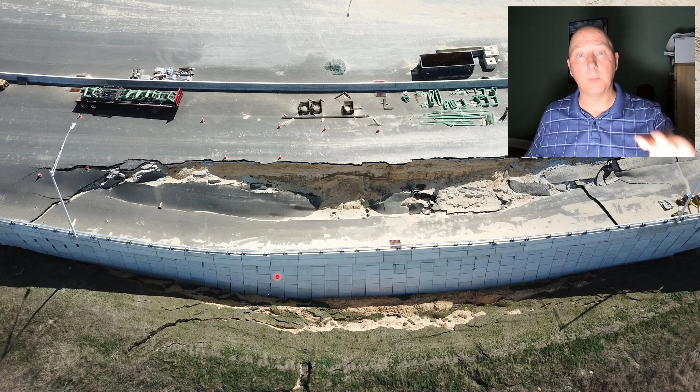All right, so this is the 295 South roadway. It was not in use at the time, but you can see what happened here: the underlying subsurface pushed out, carried the wall with it, and there was a severing there. This project is in Bellmawr, New Jersey. Here's Browning Road - this bridge is being rebuilt right now. This is 76 to 42. Philadelphia and Camden are up this way, Atlantic City's down to the bottom of the image.

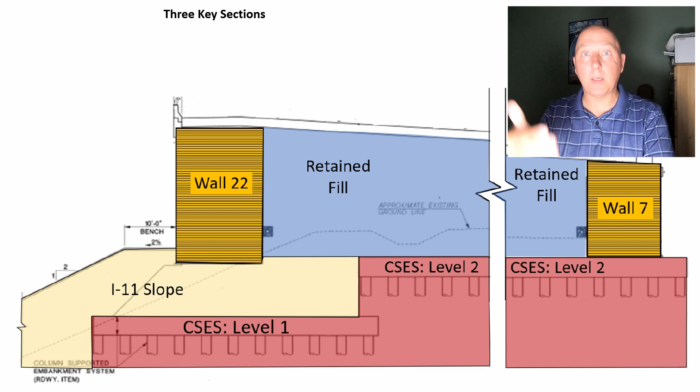And what we just showed with the failure in the roadway, this is the new 295 South right here, and they denote it as wall 22 in the documentation. They see this project as 3 sections - the document sees this as 3 sections. This sort of gives some highlights of why this thing failed, and we're going to talk about the key failures in one more slide, but they break this out into 3 sections.

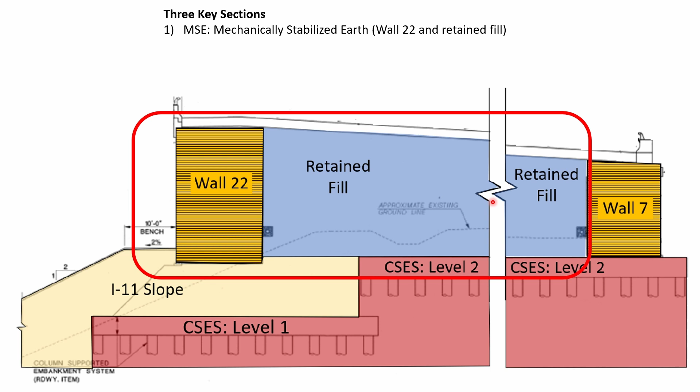The MSE, mechanically stabilized earth and retained fill - so this is the square concrete wall out here on this side. The cemetery's over here. This whole segment with the wall, its support steel bracings, and the dirt is one section. The slope here is actually a sand slope, so all the embankment here, and even under the wall - there's a hint, guys, this is all sand.

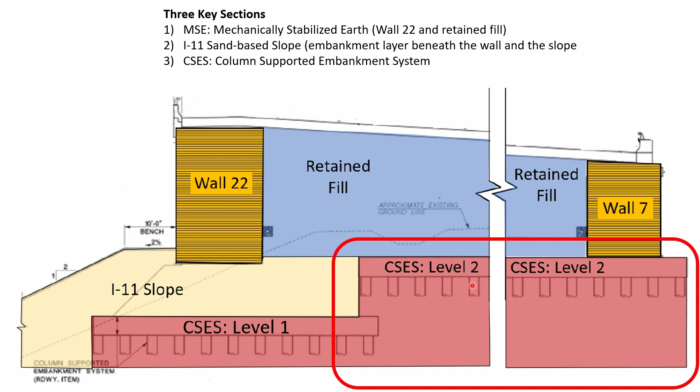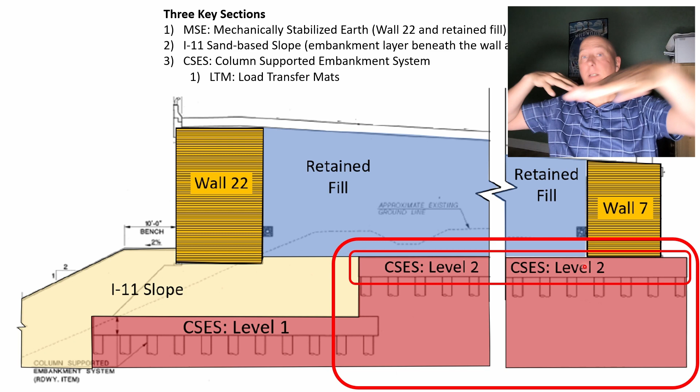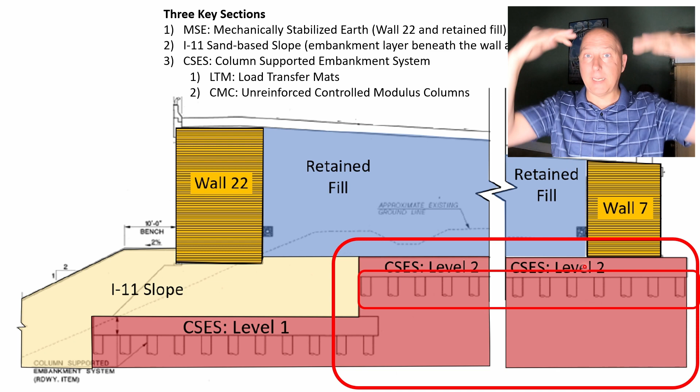And then the third segment, which I don't think I've spoken about - it's probably new to most of you guys - the CSES, column supported embankment system, that has two facets. The LTM, load transfer mats, horizontal mats that go out in a broader area to capture load above it. And then columns - these are actually, even though they're depicted shorter here, probably 70 feet long - columns that go down, so they capture the load on the mats and transfer it down to these columns to go to a lower level.

This report was actually done by Hardesty Hanover. They are not part of the Direct Connection Project. When the failure happened, the Department of Transportation wanted a sort of third-party group to analyze it. So this H&H - I'm going to say H&H because that's how they call themselves for the rest of the document - they are engineers, they build roads, they do all this stuff, so they were perfect people.

They talked to everybody - all the contractors, the design folks - did their own testing, literally tested everything that went into designing the plan, and then stopped to think: how were the conditions actually at the time of the failure? Let's rerun the calculations with that.

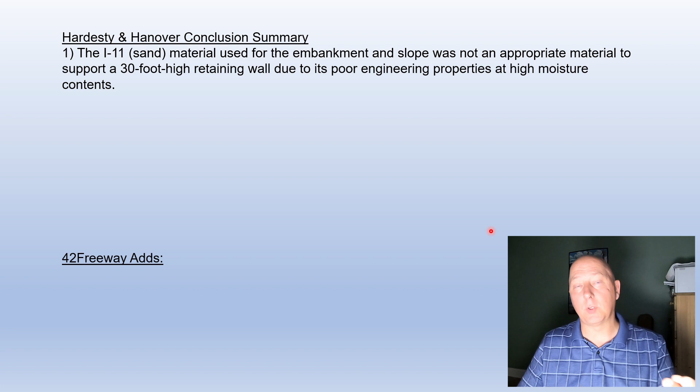So they open up their doc basically with an executive summary with, I think, 4 bullets, and then I add a couple. The I-11 sand material used was not an appropriate material to support the wall, and when the moisture conditions changed, it just made it even worse. There is a place for sand in projects like this, and we're going to learn that as we get through the slides, but it needs to be contained. And the fact that this was on a slope gave the pressure and the dirt an escape route.

The CSES, that lower level area, used unreinforced concrete columns, and they were not adequate to withstand the vertical and horizontal loads. I mean, some of these things actually sort of fractured and sheared, and they should have been able to hold up better to movement.

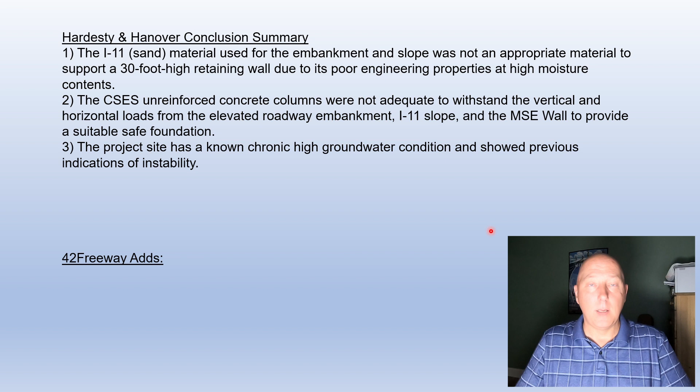The project site is known for - they use the word chronic - high groundwater conditions. A lot of research went into that. Basically, the water went higher than some of the early expectations were, and a lot of the engineering design concepts were based off a much lower water level. And the heavy precipitation the day before - actually the whole week, I think it rained 3 or 4 days out of the week - exacerbated the problem. The roadway should survive this, should stand it, but I think it's more of a straw breaking the camel's back. It's why it collapsed when it did, because so much water had hit.

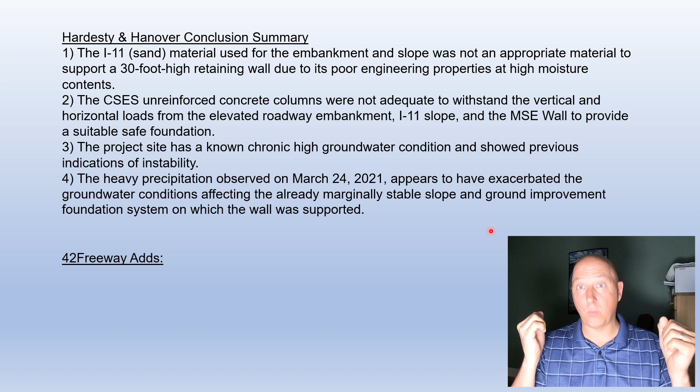I didn't want to confuse that aspect, even though I'm just giving my own verbal opinion here. But I know some of you are going to watch the first 3 minutes, so I said, let me throw these bullets in.

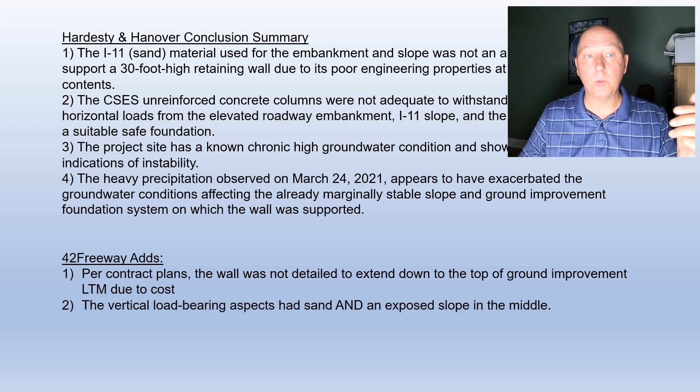Per the contract plans, the wall was not detailed to extend down. So as we'll see it again, you have the wall, you have sand, and then you have that lower level substructure. Basically, due to cost, the vertical load-bearing aspects had sand and then an exposed slope. So not only did you have the sand there, the sand was not contained. We're going to talk more about that.

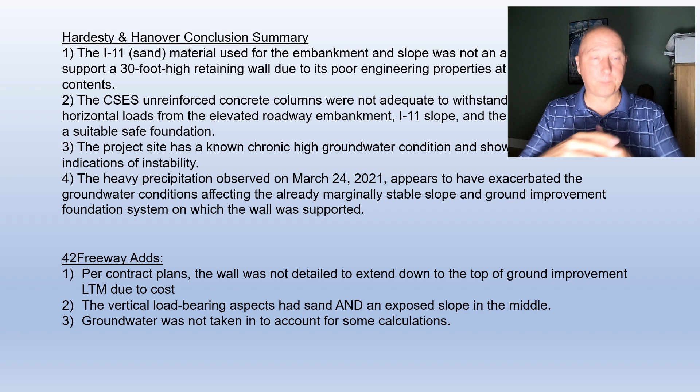Groundwater was not taken into account for some calculations. I just spoke of that.

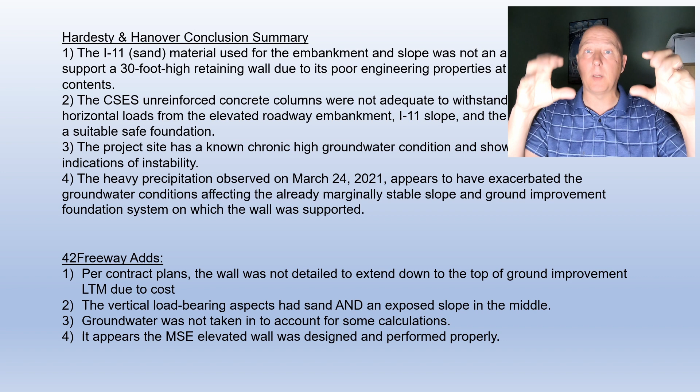The MSE, the top part, one of the most visible parts, the concrete vertical panels, was basically designed within contract specifications and wasn't really at fault here. It was what it was sitting on that was the problem.

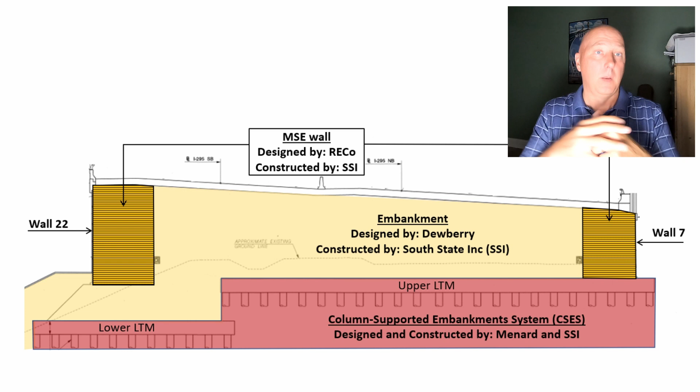All right, so this is just another depiction of the side slice. It shows some of the vendors here. South State Inc, SSI, is the main construction folks, but someone else designed the MSE wall. That's the RECo company. Dewberry was the engineer, I think the engineer of record for the whole project. And then there's the CSES embankment system, that was by Menard.

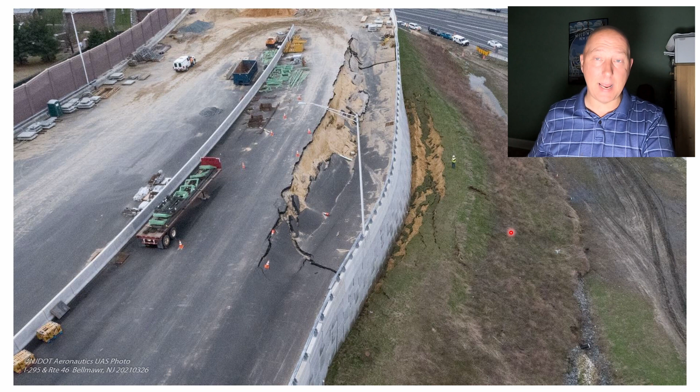Visual observations. This is just basically saying the dirt pushed down and out. Maybe this is a better depiction. Down and out. If you remember that image, and we'll see it again, how the yellow soil came underneath the wall.

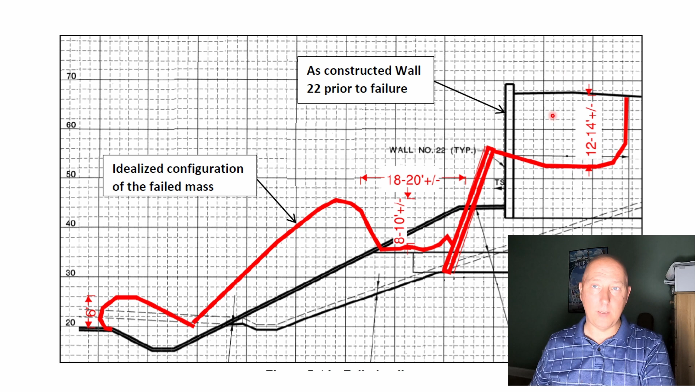It allowed the pressure to escape that way. Just another version. Basically this is showing the black as constructed, 9-foot vertical space here, the slope. The red is after the collapse. It divoted that much, 12, almost 13 feet drop. And this is the vertical wall, and that's where it rested. And then what it did is down and out—it literally just pushed the soil up and out.

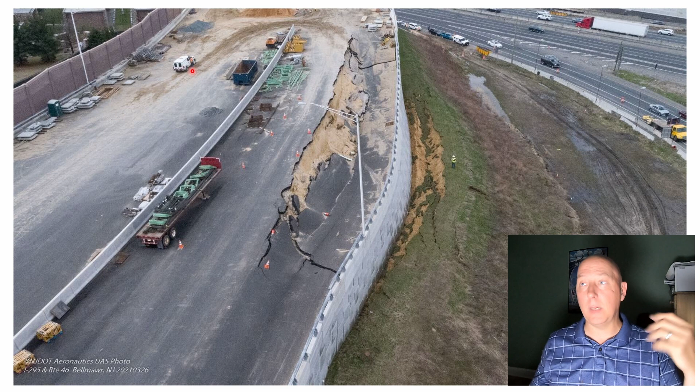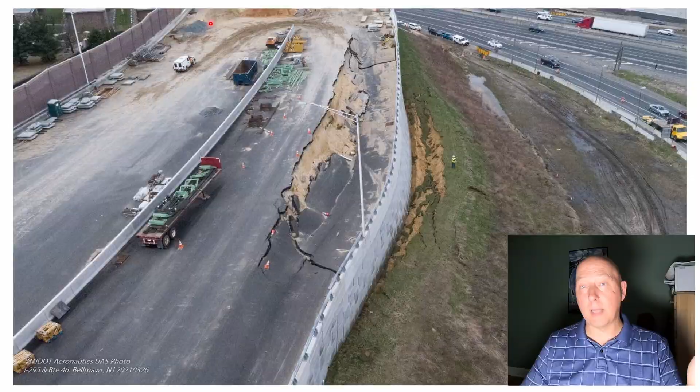First thing they got to do is make the property safe so it doesn't continue to slide further into the roadway below it. But also get in there and see what's going on—what caused this failure? So H&H came around, probably within the week. They were out there when they were doing the deconstruction, and they were there for 6 weeks, is what I saw. Basically this is the before, right after the collapse, and then this is weeks later, just to show how much they removed. We have some other pictures of that.

Step 1, make it safe. Step 2, let's get in there and see the panels, the MSE panels—was there any failure in there that caused this to collapse? Step 3 was, hey, let's dig in there deeper, let's get a look at what the LTM and those columns, those subgrade support columns, did.

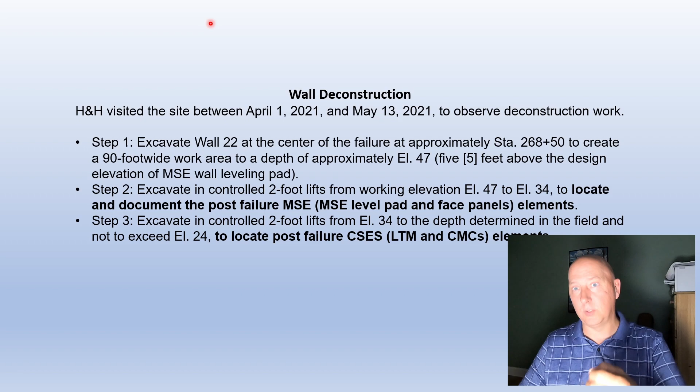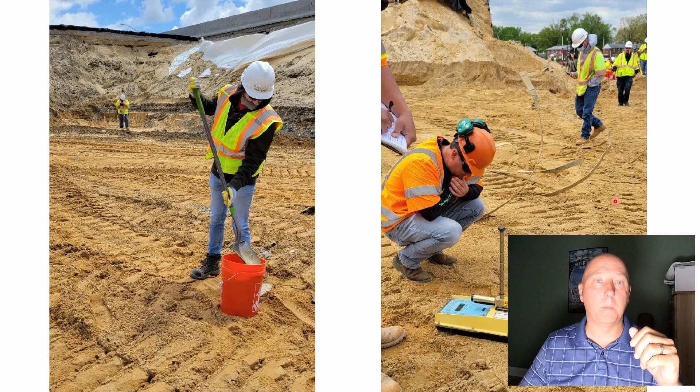Throughout the whole process, H&H tested everything—water, soil, compression, strength, everything was tested. In fact, even when they looked at the design documents, they were based on facts and figures of the water level and different things. They recreated all those and then said, okay, what's different about the project today in the area today? Let's do those variations.

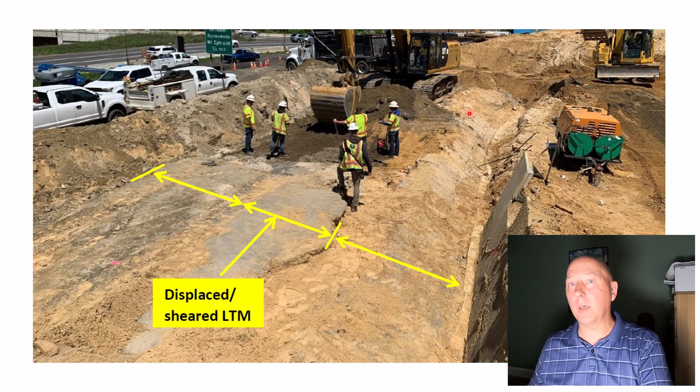This is some of the horizontal LTMs, it's a geosynthetic I think is the term. And basically what they're saying, it was displaced and sheared. There's a diagram that actually shows how much more radical this is—you can see the angle here, maybe over there a little bit better, angle, and then those are separate.

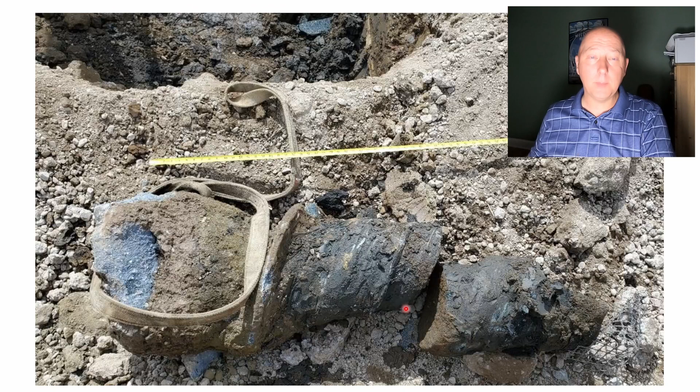This is interesting, this is the column that goes—so we're below the grade, right? So you got that horizontal piece. This is the column below, note the threads that are in it. And here's an example of a failed column—so it has threads, this one's sheared. Look, there is no sort of steel rebar going through that, that's just 70 feet of concrete. We're going to talk more about this.

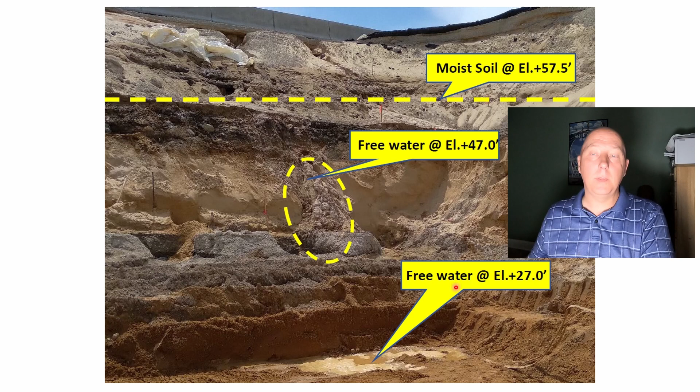Another example of them doing testing. I mentioned 30 feet as a value that was used for some of the calculations, at least one of the calculations that was important. Well, here we are, this is the wall. At 27 feet, there was freestanding water. At 47 feet, you could see moisture coming through the side here. And then at 57.5 feet, it was wet—almost double.

0 to 30, 30 to almost 60, almost double the moisture being in there.

Deconstruction summary: it appears that the slope and the underlying CSES elements shifted outward first. Some guy did a video like a year ago saying that slope was not designed in a way to hold back the pressure, but we'll get to that in a second too.

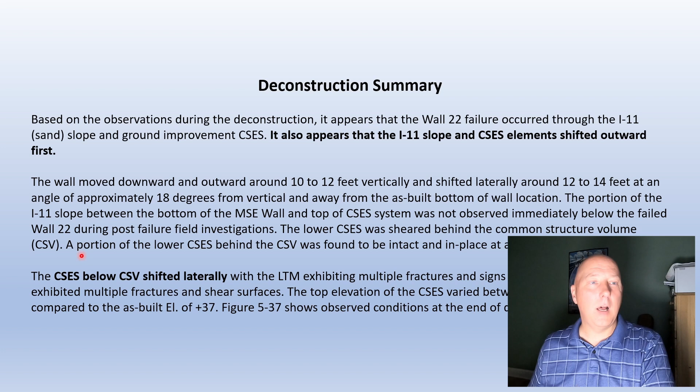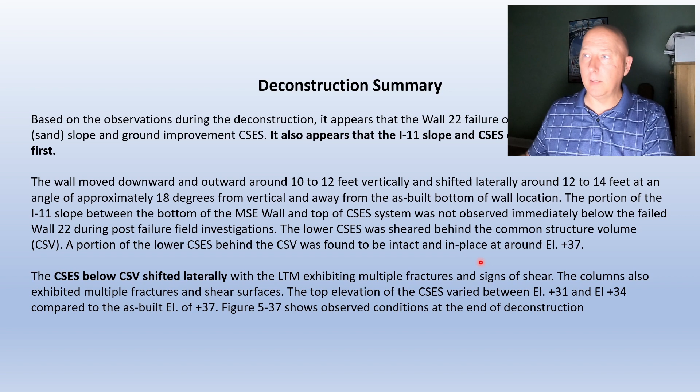And then even the CSES on the lower level shifted. Portions of it shifted out, and we had shearing, multiple fractures, signs of shearing in the columns, the LTM.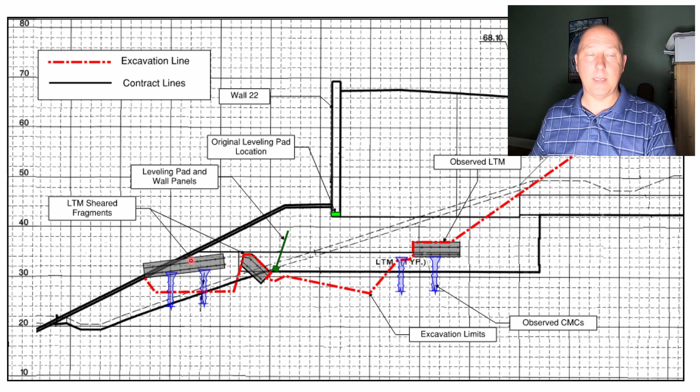This is where it ended up afterwards, probably 10, 12 feet away. This was supposedly originally a horizontal LTM. You can see the angle on that and how this shifted place.

So the wall area technical reviews coming up. Basically, there are 4 contracts. We're in contract 3 right now. Contract 3 is probably the most significant sort of new 295 contract. 1 and 2 were sort of the prerequisites.

The Bell Road Bridge was rebuilt, the Creek Road Bridge was rebuilt, all those things had to be done. The Creek Road Bridge, down by the Wawa, had to be done first. And contract 3 is a big one.

We're going to talk about how contract 2 had some work done that impacted the collapse. What this is showing here is the ground level goes across here, this red line. In contract 2, they literally dug out, I think it was 30 feet. I actually read that, dug this out.

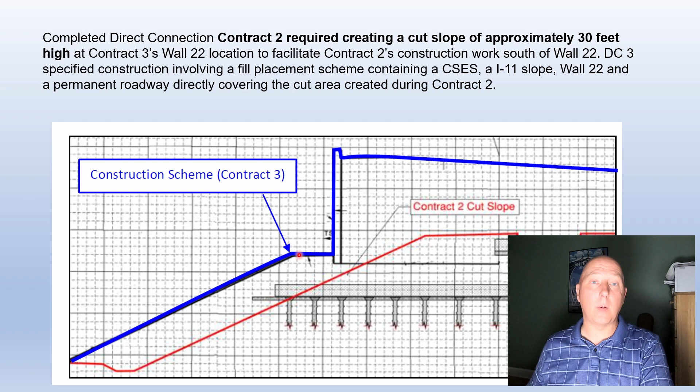And this is going to get a little bit more significant. Then what they did is after they dug that out, they had to rebuild on top of it. Even during contract 2, there were already earth failures.

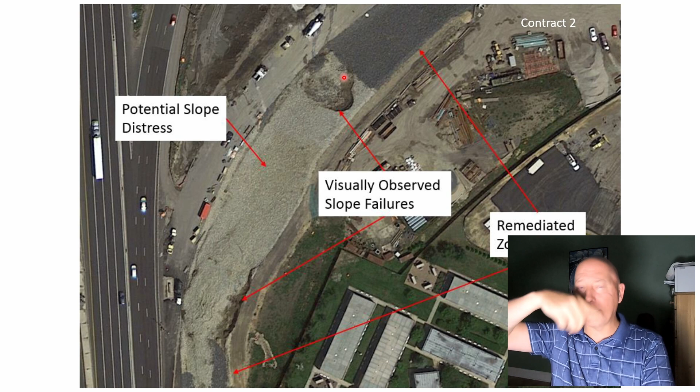Here's another side shot. I remember seeing, even later on, when they had the wall going up, they had much larger landscaping stones there, which I remember saying was stupid because eventually grass is going to grow between them, and who's going to take care of that? Those stones slid down. Look at the size of the depressions there, distressed ground.

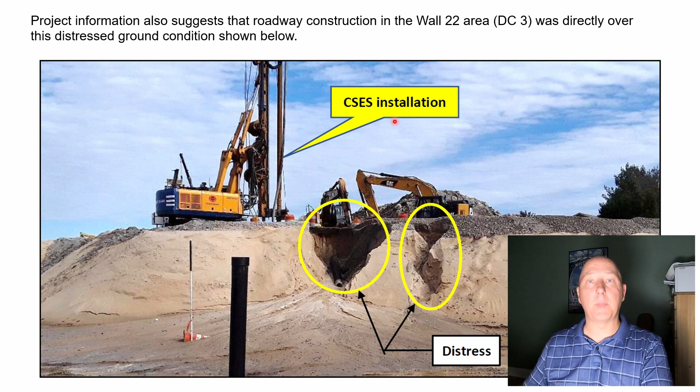This is literally the segment where the collapsed wall was built over top of. Now, of course, they fixed this, thought they had it fixed, but even after they got some of the panels up, maybe 2 or 3 rows, look, they're saying this is the ground.

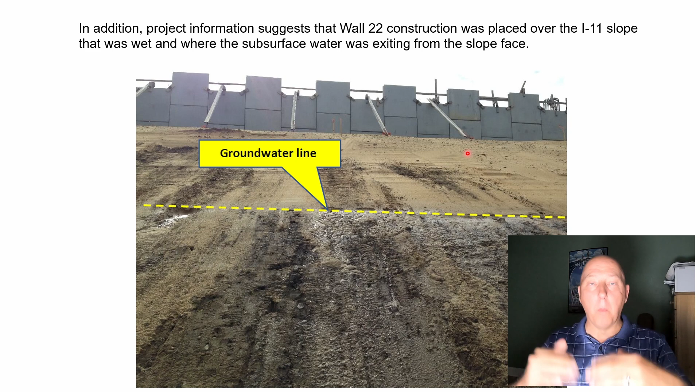This is water seeping through. So it looks like up here it's dry, it looks like dry conditions. Imagine a lot of rain - this groundwater line goes higher and higher and higher. The more water you get into that soil, the strength decreases.

Another facet here is when they did that cutout in contract 2, it dug them down into a lower level. In Deptford where I'm at, you go 6 inches, you're hitting clay, and the water just doesn't move down. So they dug this out to build it up a little bit, but then they replaced it with sand.

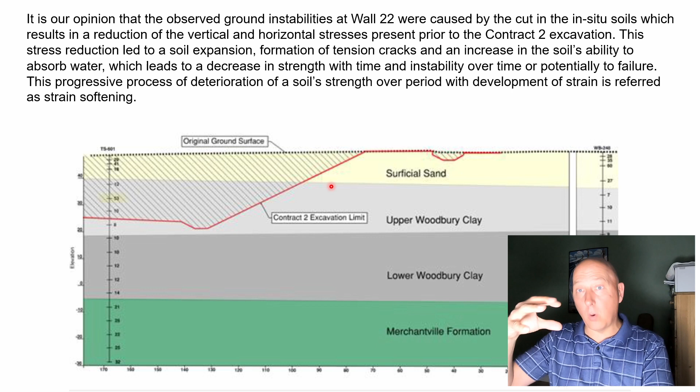So what ended up happening is they sort of created some subterranean passageways for the water to flow, both at a higher point in the wall, and then when it hit the wall, to slide down the wall.

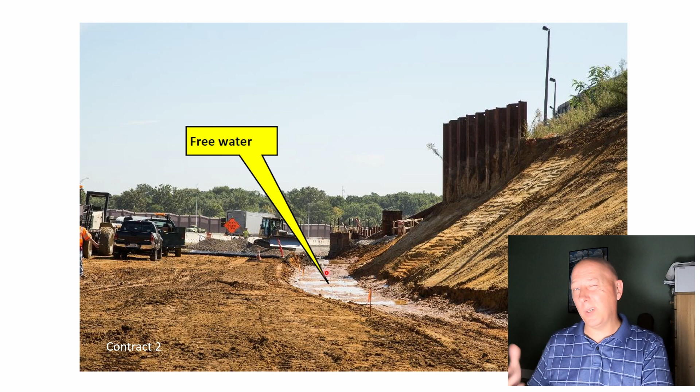So this is even before the construction, they're showing water. Here's during contract 2, collection of water. Well, maybe that's just from the rain, but look, it's all pretty dry up here. They already have some panels going up, and this is very clearly water seeping.

Now, to be clear, this is not just water sitting on the edge. The water is through the entire mountain of dirt, and this is just the part that's able to seep through, but there's water all through that.

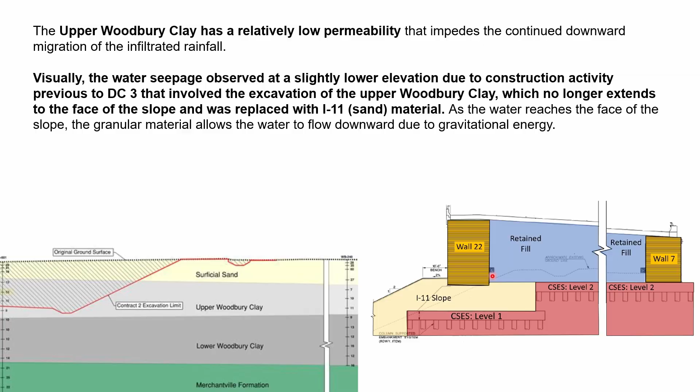Wall area technical summary - I bolded this in other parts of the presentation, but I'll just buzz through this. The wall was constructed over sand. Contract 2, removing that clay, just changed the substructure there and made the subsurface a bad thing to build on top of. The slope material was wet from the moisture going higher and higher, and it just kind of reduces the structural integrity of that soil.

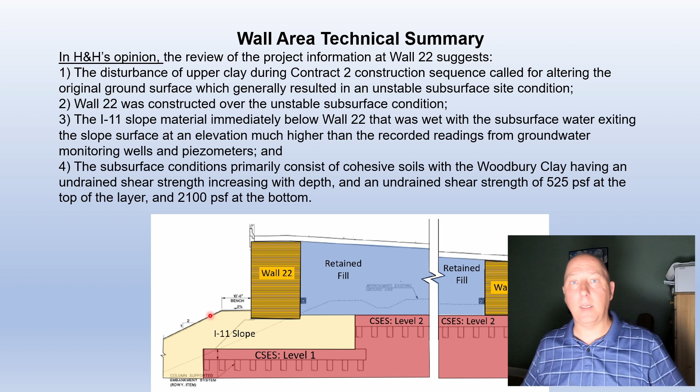There's a thing about this last bullet here, just the strength is measured, and the clay actually gave a variable strength to some of the soil materials here, which in some of the calculations they expected a consistent number that was in the middle of the value.

Design and construction, here's the 3 elements. Wall 22, retained fill, typical wall, here's those square MSE panels. This is sort of the steel fingers going into the dirt. This system works. They're basically saying that this system did not fail.

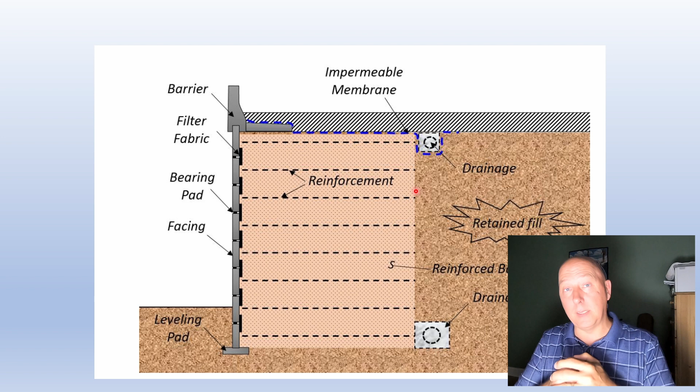What failed is what is below this. That was just some federal things. It would function satisfactorily if built on stable ground.

So basically, RECo is the company. They designed the MSE. SSI installs it, but I think RECo not only designs it, but I think they build the panels themselves. And in their document, they said, hey, this would function satisfactorily if built on stable ground. And the document assumes that others would be responsible for design of the lower level.

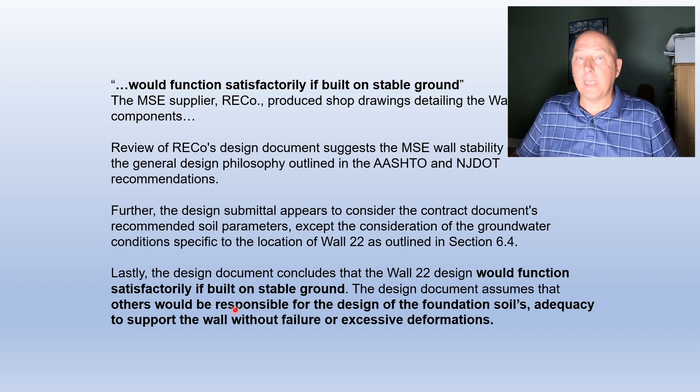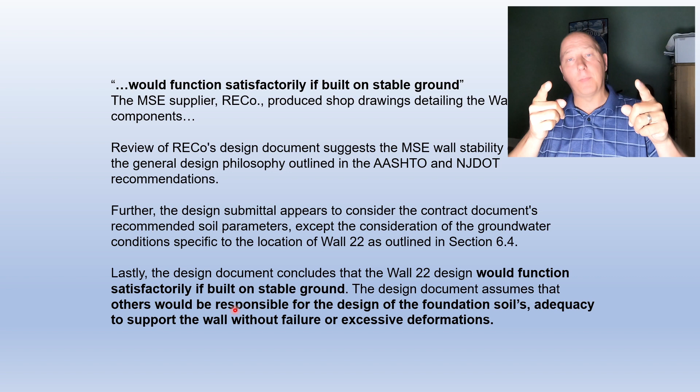That's a common thing. If you're a framer for a house, you're hiring someone else to build the concrete block basement. You want to know that it's safe and it's done, but you're relying on their engineering. If the wall blows out below the house into the basement and your wood frame crashes down, people driving by are going to say, wow, that wood frame failed, but no, reality is it failed below it.

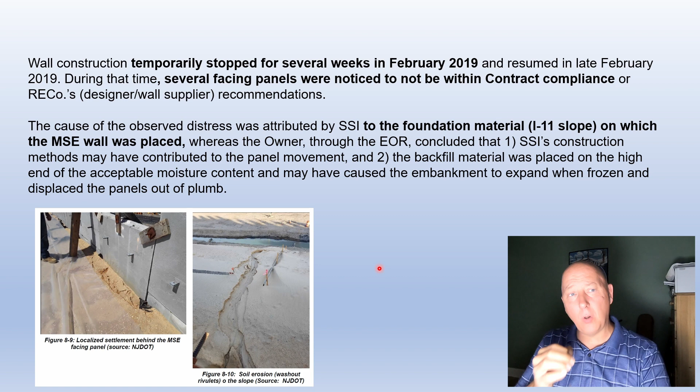Moving fast, just to call out, apparently back in February 2019 there was an install issue with some of those panels that was addressed and passed everybody's criteria. They do call it out here. I think it makes it into a bullet, but then they don't really tie it back to being anything significant to why things failed. So the MSE Summary.

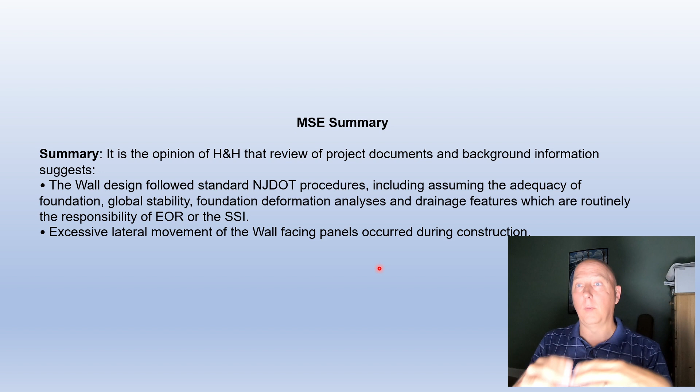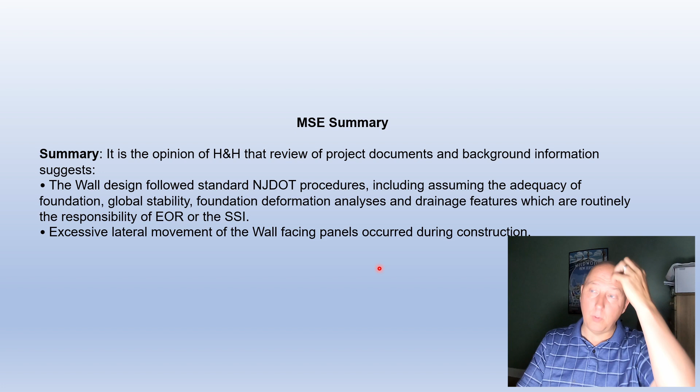Remember, there were 3 things we were reviewing, 3 core construction areas. This is the MSE, the first one. The wall design actually followed the standards, the procedures. It was done good and fine. There was also excessive lateral movement of the wall during the construction, which doesn't really get mentioned much, that's probably the only time. The second part is the slope design.

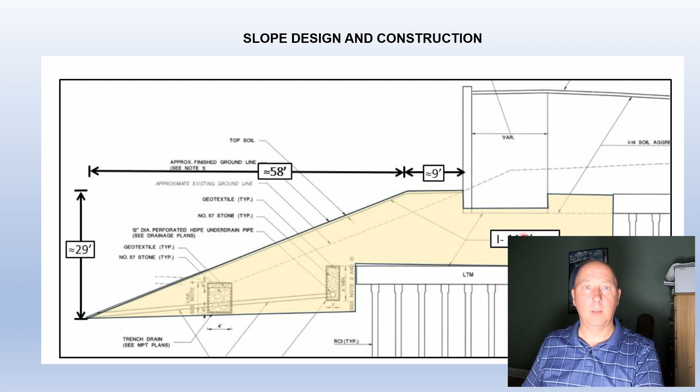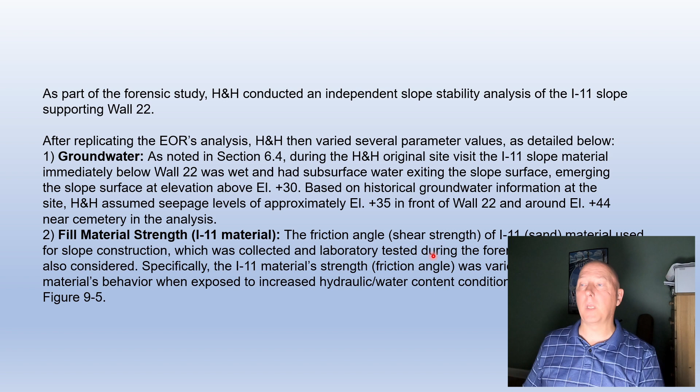If you remember, this is the sand here. Part of the forensic study conducted an independent slope stability analysis of the slope supporting the wall. So they replicated all the original tests and said, okay, you know what, solid, good job, guys. They said, all right, well, let's redo this, but let's consider that we found groundwater as high as 44. They based everything off a slope elevation of 30, but we saw it at 35 and even 44. They also retested the strength of the fill material.

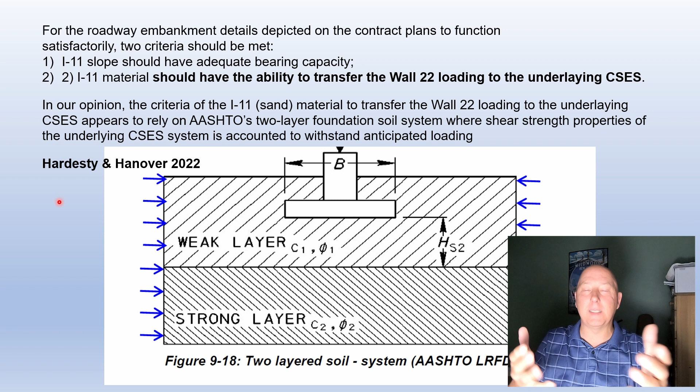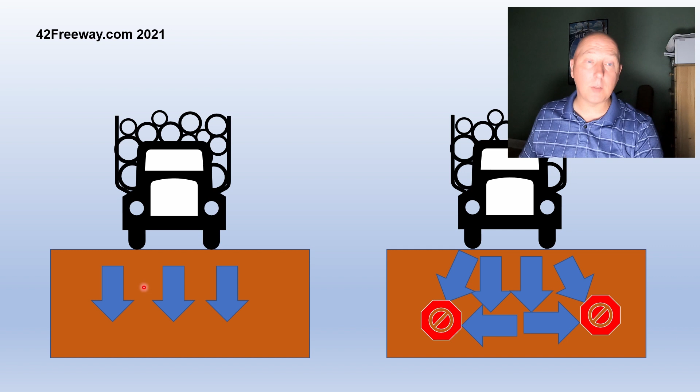Trying to give myself a pat on the back here. A year ago, within a week of the collapse, I put my own video up, and I basically drew some scenarios here where I'm like, look, a truck rides on the ground, and when it's flat and there's earth there, it doesn't sink because the dirt can't shift out.

Now look at this, 12, 13 months ago, I did a very similar diagram. Of course, mine's inverted to the other way around, but here's the road, here's the fill, pressure going down, going out, and I'm saying no pressure holding back. In my commentary, I literally say this exact same thing, like, hey, if this had been flat, think about this.

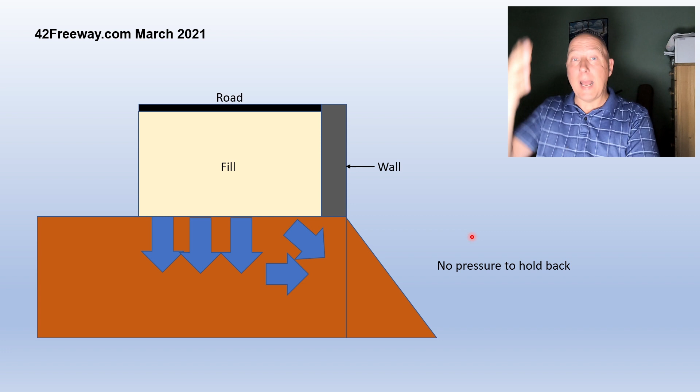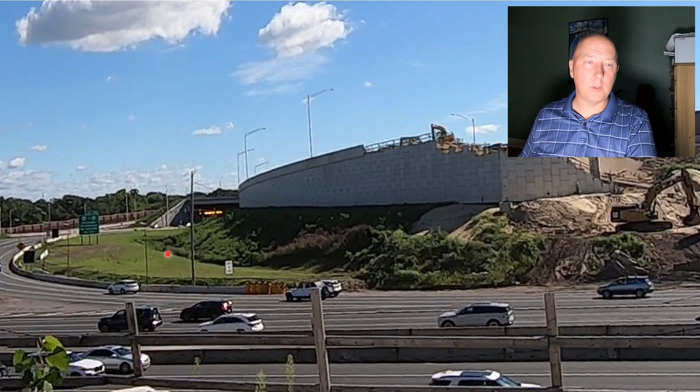When they come up with a new design, they could actually extend this wall all the way down to the lower level grade and not have a slope. They probably went with a slope to save a heck of a lot of money on the MSE wall. Just a thought, guys. No, here's the slope here. Imagine if this went all the way down. Well, then you'd have all of this dirt to help hold back the force of the pressure.

This is my corny thing.

I did a depiction of my house, putting a hot tub next to the house, and the local inspector guy said, hey, before I approve this, you need the engineer to tell me that the weight of this doesn't push through your wall.

8 pounds per gallon of water times 400, 500 gallons doesn't push through your wall. And it's funny that the local inspector caught this aspect, but you would have thought.

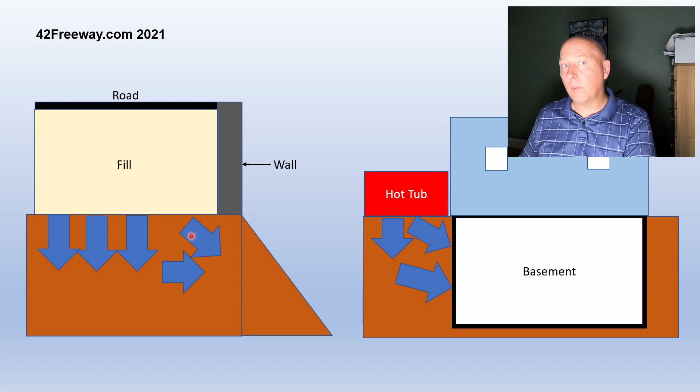All right, MSE Summary, a lot of words here. A 2-layer soil system is applicable only for a flat surface or when it's contained, like soil in a bucket. Soil placed over unstable ground condition - we talked about that with contract 2 and the clay. That made the slope stability check

warranted during the design phase. They're basically saying that in some aspect, when they were designing the project, they didn't consider all the factors, like maybe the groundwater being in a different position. I think there's some more slides on that.

Test results indicate the sand material strength decreases as the moisture content increases. So as you get more moisture, and as the moisture goes higher up in that sand and fill, it actually

decreases the strength of what it's trying to do, and it can cause things to start sliding. That being said, the sand material actually meets the standards of the Department of Transportation. It's just maybe not implemented properly - it wasn't contained.

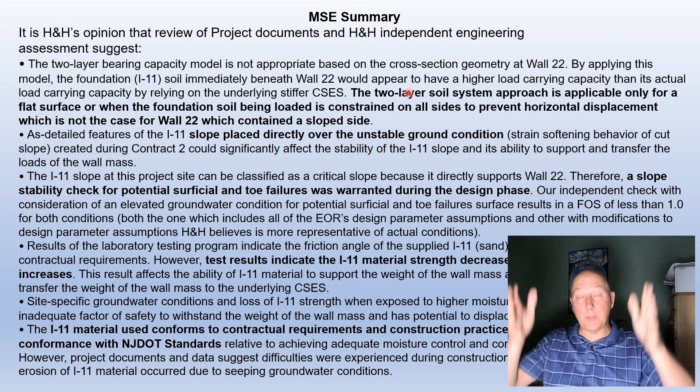Going back to the first bullet - I'm pointing so you guys can see my screen - the first bullet says it needs to be flat, needs to be contained. In this case, it was not either of those.

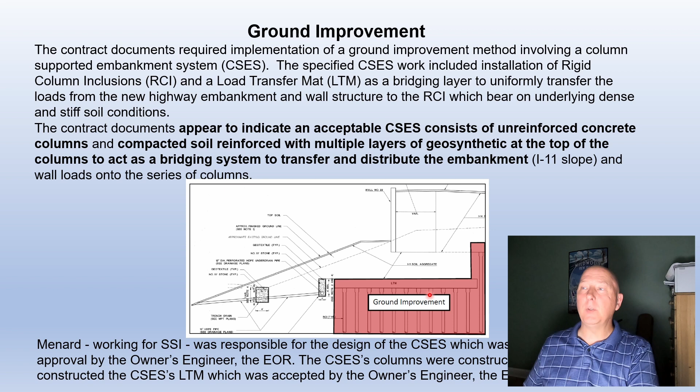Ground improvements, third segment here. This is the lower level, the LTM CSES. The columns are unreinforced concrete. The LTM is a geosynthetic, multiple layers of geosynthetic.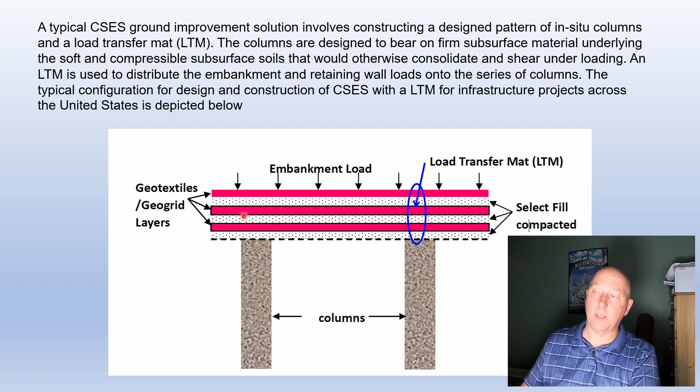The federal government does call out that a steel and concrete column is going to be able to handle higher capacities of load, but it's more expensive.

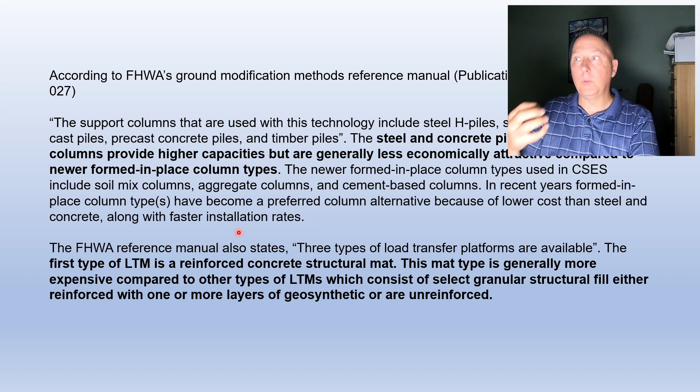Similarly, the horizontal LTM, if it's a reinforced concrete structural mat, it's going to be able to hold more, but it's going to cost more. In the case of the direct connection move, I'm not saying it's even needed, but they did not use steel reinforced for either the LTM or the columns.

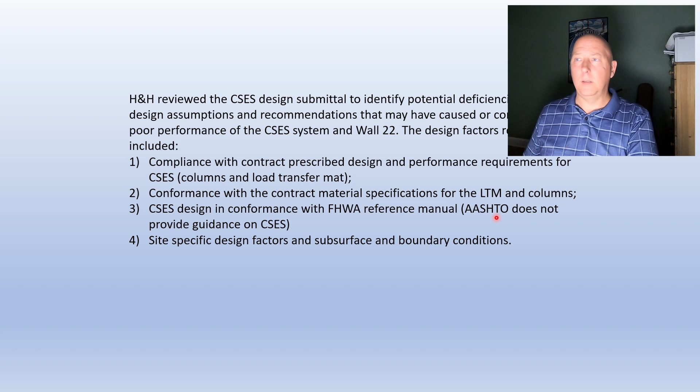This is just some of the checks they did, to get some more checks just to make sure everything works.

So this is interesting. Initially, the columns were specified as a 15.6 inch and a 17.8 inch column, and it also says that the recommended geogrid layers appear inconsequential in transferring most of the embankment load.

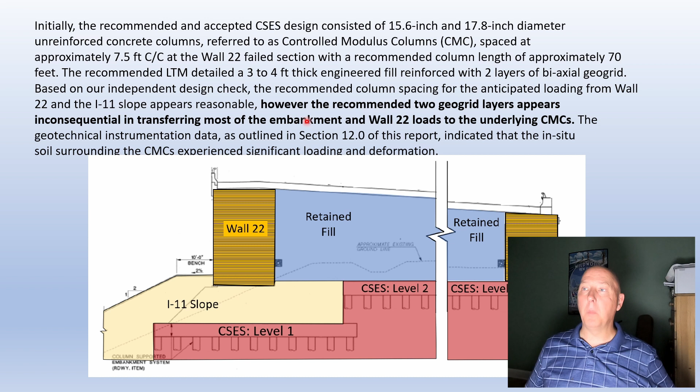Basically, they're saying what's happening up here doesn't ever really get down to hit down here, because of the way the slope is designed. So remember this 15.6 and 17.8.

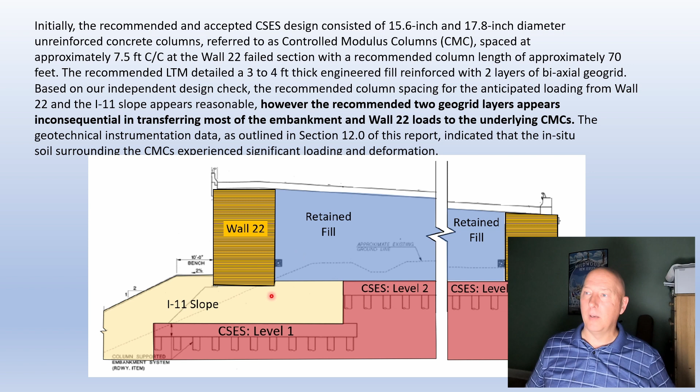During the design of some part of the project, the Menard company, who's designing the lower level of the CSEs, comes back and says, hey, you know, it says 15 and a half, it says almost 18 - how about we go with a 12-inch column, but it's going to be a threaded column.

So what that means is, you can see in the image here, it's being threaded. The surface area, the adhesion to the soil around it, is going to be greater, even though it's thinner. They also have an interesting idea here.

The way they do this is not like if you build a deck in your backyard, where you put those sono tubes in and you dig and pour. They have this auger that goes down 70 feet, but it's hollow in the middle, almost like a needle where the medicine comes through.

The auger goes down. When it hits the lowest point, they pump the concrete through the hole, and then they back it up. It's just a grout concrete. Because of the structure, you can't put any sort of steel rebar.

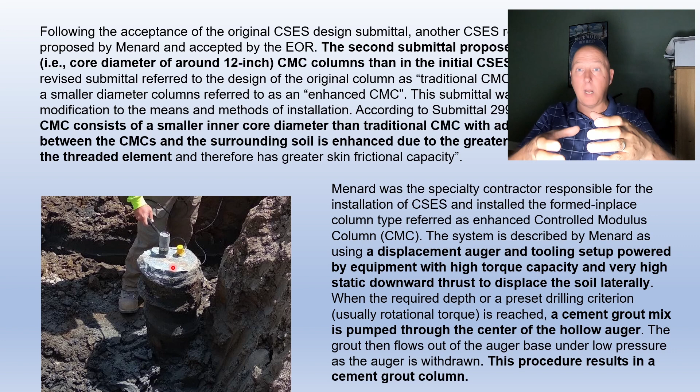When they built the support columns to hold up the elevated roadway, you could see they built like thick steel rebar in those columns. It increases the strength of the concrete immensely. They don't have it for these subterranean columns.

So they did check all of the Menard's analysis using all the original known things, the groundwater levels. They say, hey, good, you guys did a good job. But then H&H said, hey, let's consider that the groundwater wasn't what it was.

Menard's design analysis assumed a uniform groundwater level at elevation of plus 30 feet. This is right from the document, I didn't write this. H&H said, though, with the failure, they saw plus 44, plus 35, depending on where it was located on the wall. So they reran all the calculations based on that.

The in situ is the original, I guess. They're saying that the shear strength varied - I think it was related to the slope and the drainage - that it actually varied depending on what part of the project you were on. Menard used a consistent 1294, like sort of a middle of the road value there.

And the columns going down, there's no reinforcement, it's just concrete. There's another comment later on where they bring this up - by having concrete in there, or even some other structure, I don't know, fiberglass, that's what they do for pool concrete. It gives it more flexibility, more ability to withstand movement, and also just being significantly stronger.

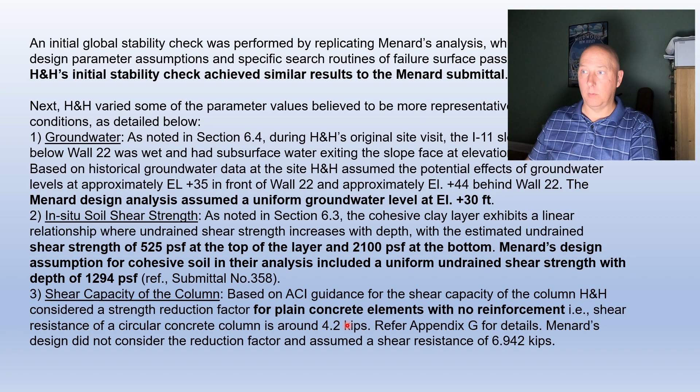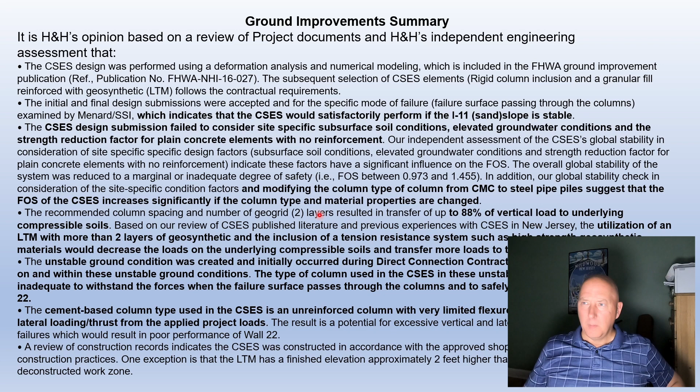Didn't factor in the soil conditions, didn't factor in the higher water, and didn't factor in the plain concrete elements. It calls out here that while it doesn't give a percentage of better performance, hey, if you used a different column type, it would have held up better. And this is interesting - 88% of the vertical load to the underlying went to the compressible soils, not to the columns. Just in the way the LTM was designed, I believe what they say here is that if they used more layers of the geosynthetic material, or maybe even a concrete-based one, it would have captured more of that pressure and pushed more load to the columns.

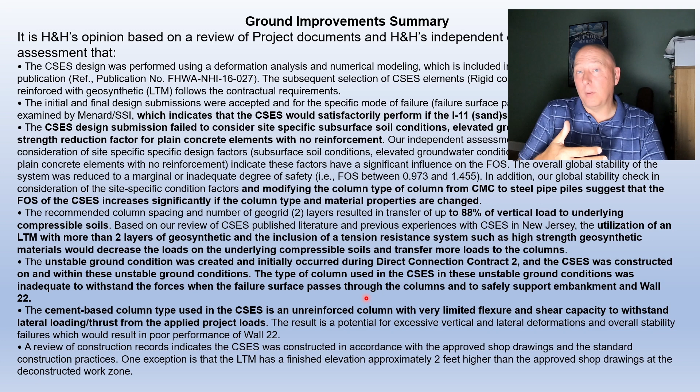It says right here, the unstable ground condition initially occurred during contract 2, and just straight up saying, hey, the type of column used in the CSES in these unstable ground conditions was inadequate to withstand the forces when the failure surfaces passed through. Maybe they're kind of saying, hey, this happened right before the contract, but I think all that was designed right. Anyway, I'll let someone else make that determination.

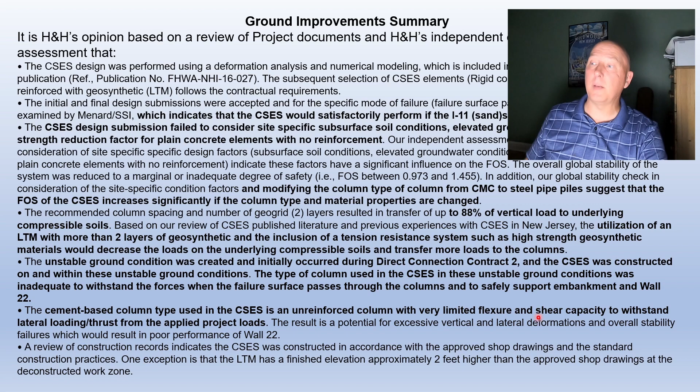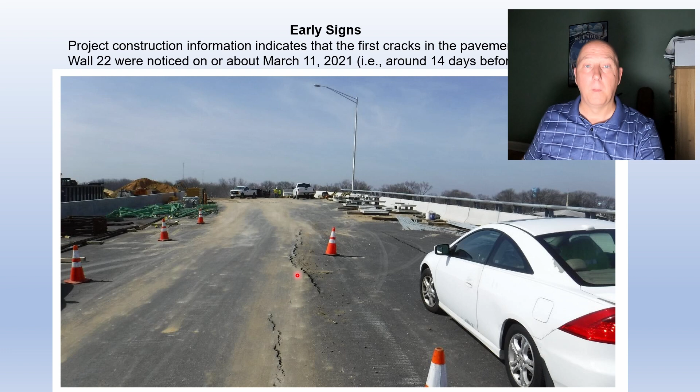The cement column is unreinforced with very limited flexure and shear capacity to withstand a lateral loading thrust from the applied project loads. Another thing is there were early signs of this - this is 14 days before, look at this crack here. Basically, the rain was the straw that broke the camel's back when the whole wall slid.

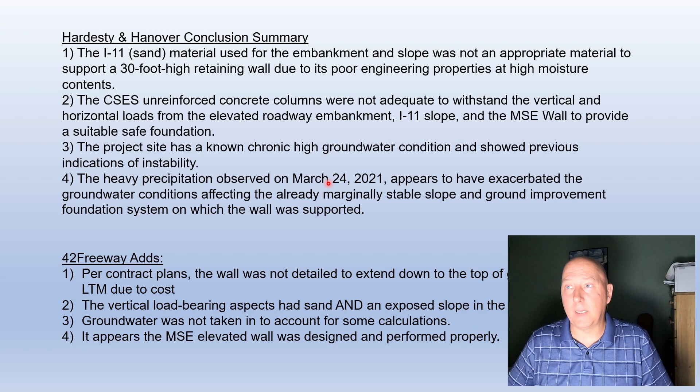And then what we end up doing is just repeating the part in the beginning, which was the executive summary, which is just another repeat. And that's it. Did I get this under 30 minutes? I think I did, I literally shaved this in half. I moved really fast, it's the best I can do. I've literally been working on this for like a day and a half. I've done this so many times.